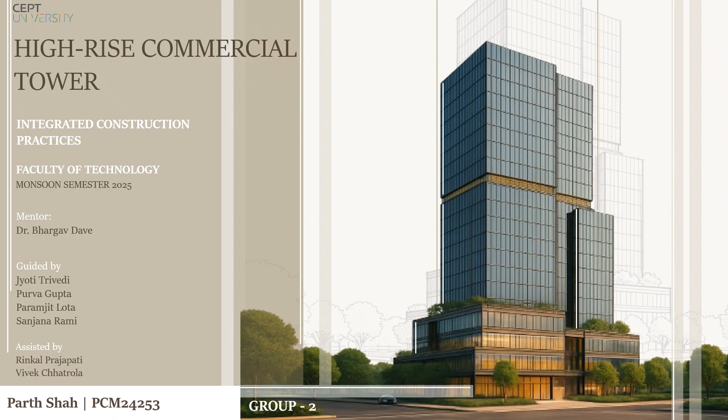Through BIM, we'll learn how digital models enhance clarity, reduce rework, and support informed decision making across all stages of the project. Bringing these approaches together helps us develop a holistic understanding of how complex projects are planned, coordinated, monitored, and delivered in today's industry.

Moving on with the project brief. As a part of our studio, a real life project has been taken up, which is a High Rise Commercial Tower. It is a 3 basement G plus 29-story commercial tower located in the prime business district of Gift City. It has been envisioned as a modern workplace offering premium office spaces supported by efficient planning, contemporary amenities, and sustainability driven design principles.

The development occupies approximately 5,970 square meters of land and comprises a built-up area of over 66,000 square meters. The overall investment is around 415 crores with an estimated construction cost of around 160 crores. The work is being executed under an item rate contract and the construction timeline extends from November 2023 to July 2027.

The location of the project is one of its strongest attributes. Situated within Gift City, a planned financial and technological hub, the site benefits from excellent regional connectivity. It is in close proximity to the airport, metro, major road, and surrounding commercial and institutional infrastructure. The project falls within the DTA zone, which supports large-scale commercial development and encourages organized urban growth.

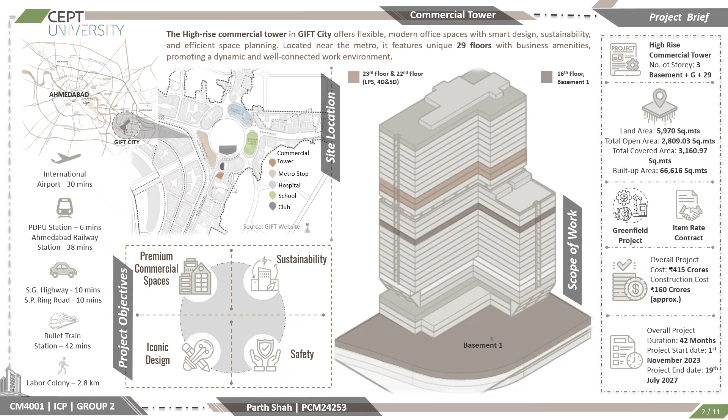For our studio, the assigned scope includes one basement level and the 16th floor. Within our group, responsibilities were divided to simulate a real-life project environment where I had taken up the responsibility of structural and plumbing consultant. Other consultants were distributed among the team members. Therefore, this slide establishes the complete background of the project, outlines the stakeholders, and defines the specific scope taken up for our studio, forming the foundation for further work.

Next, we focus on the concepts of level of development and level of schedule and how they guided our planning and modeling process throughout the studio. Level of development or LOD defines the accuracy, detail, and information maturity of model elements. The standard LOD progression includes LOD 100, 200, 300, and 400 for fabrication ready details.

Level of schedule or LOS works alongside LOD by defining the structured sequencing of activities that support model development. Together, LOD and LOS form a unified framework that strengthens clarity, coordination, and decision making. The integration ensures that information evolves in a controlled manner, reducing rework and improving the reliability of both design outputs and project timelines.

To implement these principles, we prepared a comprehensive weekly milestone design schedule similar to what consultants develop in real world projects. This schedule outlines when each discipline should complete their assigned activities. This approach helped us monitor progress, distribute responsibilities efficiently, and maintain accountability across all weeks.

The schedule begins with foundational tasks such as BEP and EIR preparation, followed by progressive discipline-wise LOD 300 modeling for structural, architectural, mechanical, electrical, plumbing, and firefighting systems. It then advances to clash resolution checks, model integration, LOD 400 development, quantity takeoff exercises, and eventually 4D and 5D simulations. This systematic sequencing ensures that every modeling stage is completed with the required level of detail before moving forward, reinforcing the importance of proper planning in a BIM-based workflow.

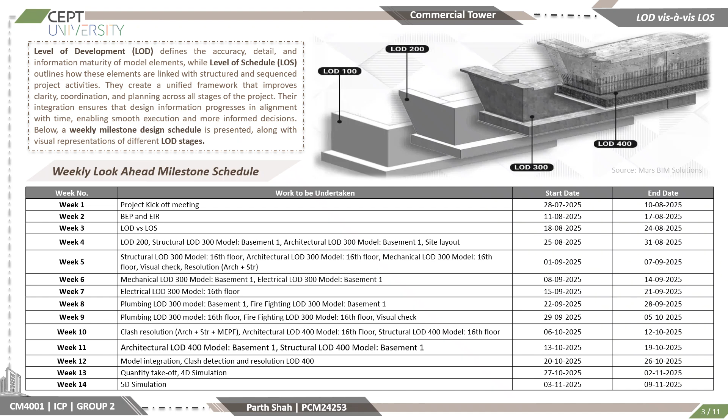Further, the Model Element Author table has been presented in this slide, which defines the responsibility distribution across all disciplines involved in the project. MEA essentially identifies who is responsible for creating, developing, and updating each model element, ensuring accountability and clarity throughout the BIM workflow. Based on our project scope, the architectural and structural models were developed up to LOD 400, which includes detailed reinforcement modeling and construction ready information.

The MEPF services were modeled up to LOD 300, providing accurate system layouts and coordination geometry suitable for design and clash resolution. This structured allocation of authorship helps streamline coordination, avoid scope overlaps, and strengthen interdisciplinary alignment. It supports efficient model development across phases, right from site development to architectural, structural, and MEPF systems. By clearly defining responsibilities, the MEA framework enhances clarity, reduces rework, and ensures that each discipline contributes precise, reliable data to the federated BIM model.

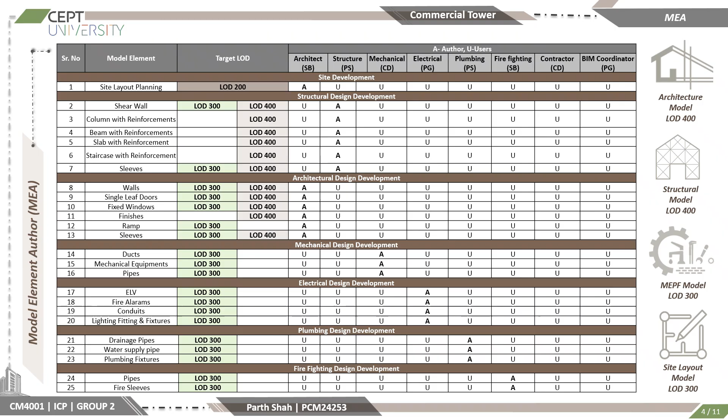In this slide, the key model elements developed across architectural, structural, electrical, and firefighting disciplines are showcased. Each component, from doors, walls, staircases, and curtain walls in the architectural scope of work to reinforcement, shear walls, and diaphragm walls in the structural scope, has been modeled with the appropriate level of development to reflect accurate geometry and construction intent. Similarly, the electrical and firefighting systems, including cable trays, conduits, lighting fixtures, detectors, and pipe networks of various diameters, have been precisely represented to support coordination and systematic planning.

All these models were created using Revit as the primary authoring tool, ensuring consistency and accuracy in detailing. The entire workflow was supported through collaborative coordination on Autodesk Construction Cloud, enabling seamless communication among the stakeholders involved.

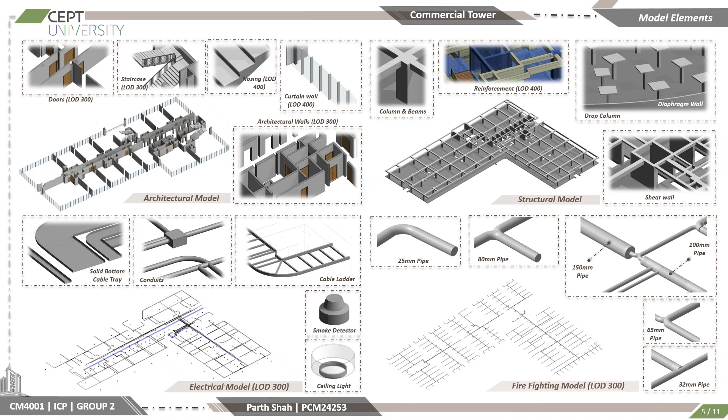This slide highlights the key elements developed under the mechanical and plumbing disciplines, each modeled up to LOD 300. The mechanical scope includes components such as exhaust ducts, air grills, butterfly valves, fresh air ducts, and chilled water supply and return network. Similarly, the plumbing scope captures flushing water lines, soil and waste pipes, domestic water inlet pipes, and rainwater drainage systems. These elements have been modeled with accurate geometry and routing to support coordination with the architectural

and structural models. The development of these systems follows the MEA Model Element Author Framework, which assigns clear authorship for every model element. This ensures accountability, avoids overlaps, and maintains discipline-wise clarity during model progression. This structured and collaborative workflow ensured that each service was modeled accurately and integrated efficiently within the overall BIM environment.

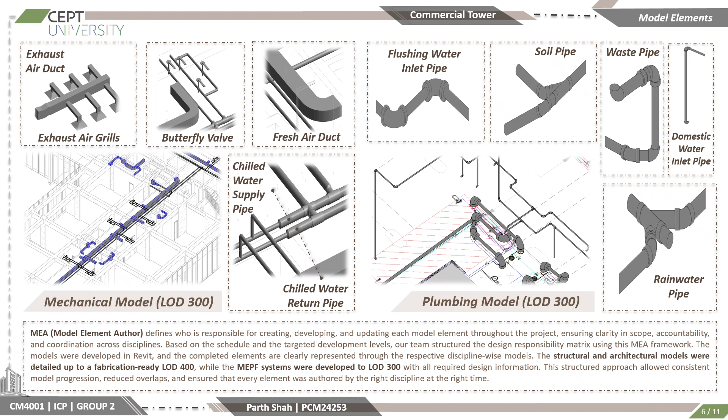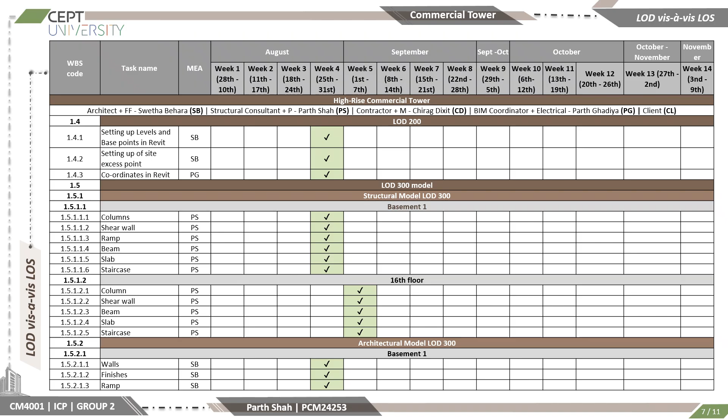By tracking the development of LOD 200, 300, and 400 models across multiple weeks, this schedule helped us maintain structured model progression, avoid delays, and align the entire team on priority tasks. Overall, this timeline served as a guiding tool to monitor progress and ensure that each milestone was achieved in accordance with the planned design workflow.

Further, 4D and 5D simulations were developed for the 22nd and 23rd floors, which formed the core scope of our simulation work. In simple terms, 4D simulation connects the 3D BIM model with the project schedule, allowing us to visualize the construction sequence over time. 5D simulation adds the cost dimension, enabling us to link quantities and rates with the model to generate accurate cost insights and earned value outputs.

For the 4D workflow, the structural model with assigned pour IDs was imported into Navisworks and the MSP schedule was linked to the model. Each activity was configured, animation settings were applied, and the construction sequence was exported as the final 4D simulation. For the 5D process, quantities were extracted from Revit, unit rates were defined, and the actual schedule from the LPS analysis was incorporated. These values were then transferred into Synchro to calculate actual quantities, cost, and generate earned value graphs.

Both floors were divided into two pours, and these divisions helped us sequence the work accurately in the simulations. Overall, the integration of time and cost provided a clear data-driven workflow that strengthened forecasting, improved coordination, and supported better project control.

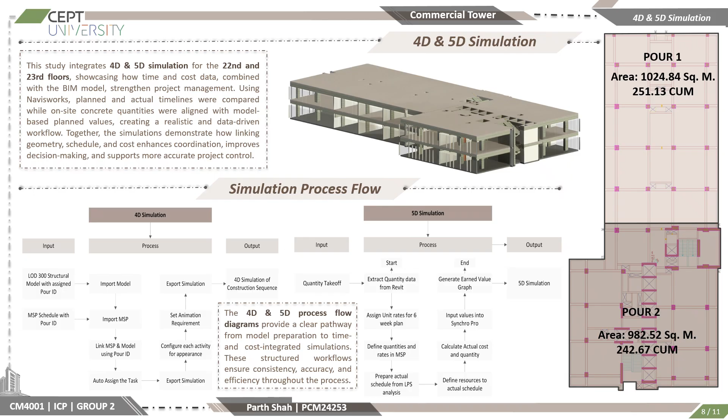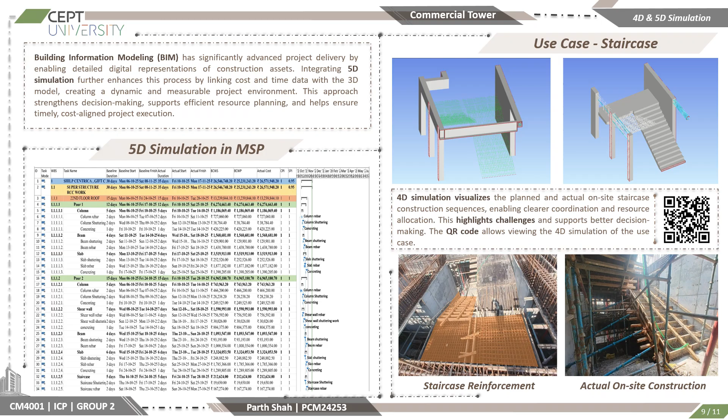Through 4D simulation, we were able to visualize both the planned and actual construction sequence of the staircase, clearly identifying the activities that overlapped and the points where sequencing could be improved. By integrating these simulations, we could better understand how the sequence could be optimized to avoid delays, reduce rework, and streamline resource planning. The comparison between the model-based sequence and actual on-site staircase work highlights how digital workflows can help mitigate constructability issues and support more efficient decision making.

Next, 5D simulation and earned value analysis for the 22nd and 23rd floors was done. The 5D simulation was developed both in Navisworks and Microsoft Project, where time and cost were integrated with the BIM model to understand not only the sequence of activities but also the financial impact of each stage. The model-based visuals shown here compare the planned versus actual construction activities, allowing us to identify deviations and monitor progress more effectively.

Alongside this, an earned value analysis matrix was prepared calculating key performance indicators such as planned value, earned value, actual cost, cost variance, schedule variance, CPI, and SPI. These values were plotted on an S-curve, which provides a clear picture of the project's performance over time and highlights whether the work is ahead or behind schedule and budget. The 5D simulation also maps each task with its corresponding cost, helping forecast resource needs and supporting more informed decision making. The QR code included on the slide allows direct access to the full 5D simulation, enabling viewers to observe the construction progression as per the actual timeline.

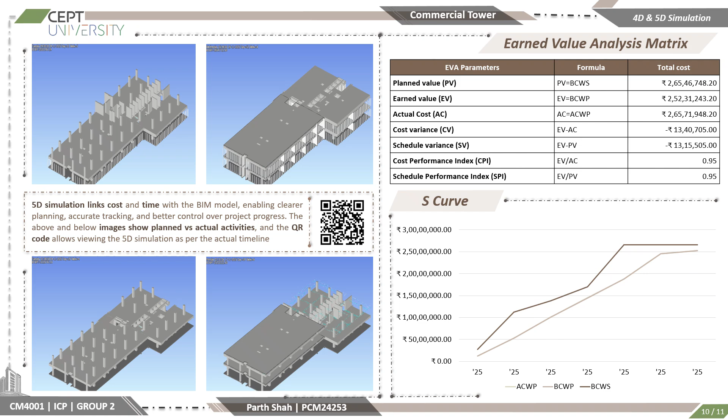Thus, summarizing the key learnings gathered throughout the study, beginning with the project brief, we developed a clear understanding of the scale, stakeholder roles, construction methodology, and on-site challenges associated with the commercial high-rise tower. Our studio scope was directly aligned with the real execution cycle and GFC release timeline, which allowed us to engage with the project in a realistic and industry-oriented manner. The integration of LOD and LOS was another major learning. It helped us understand how geometric detail and information maturity progress in parallel with the design schedule, ensuring structured, accurate, and coordinated BIM development.

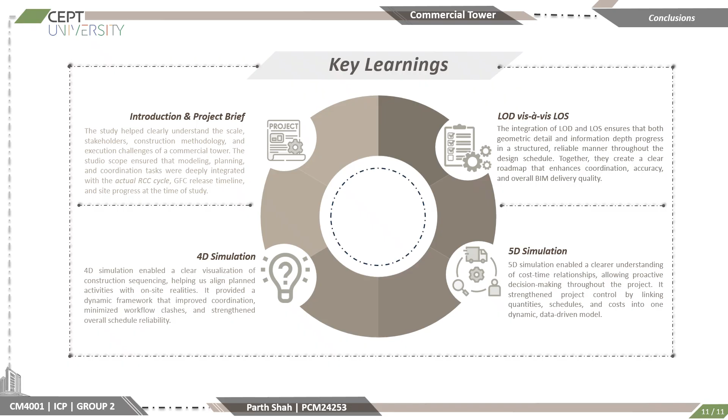The 4D simulation enhanced our ability to visualize construction sequence, identify workflow conflicts, and align planned activities with actual on-site operations. The 5D simulation further strengthened this by linking quantities, schedules, and costs, giving us a data-driven model for monitoring project performance and supporting informed decision making. Overall, the project provided a holistic experience in modeling, planning, coordination, and simulation, reflecting how BIM workflows operate in real-life project environments.